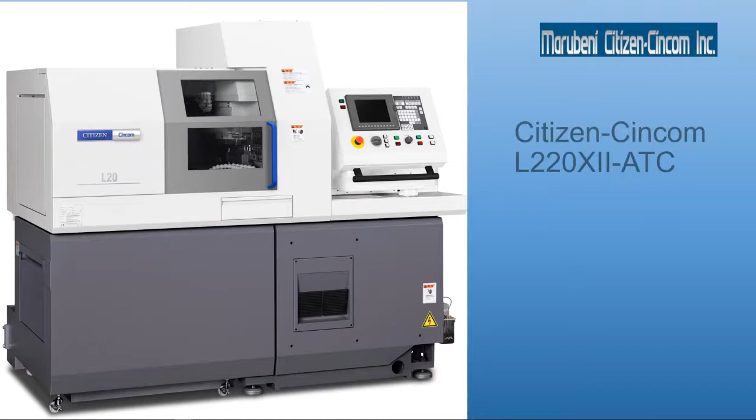We are here to talk about the Citizen L20 Type 12 ATC, as it's called, the automatic tool changer machine. This is the latest innovation in the L20 line of machinery from Citizen Machinery. We're going to do a little introduction today, let you know what it's all about. It does stand for automatic tool changer, something innovative that we put on this machine.

First of all, how did we develop this machine? I'm going to go back the Wayback Machine and give you a little bit of history about the L series and how we arrived at this point in time.

The L series machine, there's about a 30-year history of the Citizen-Cincom L series, and throughout that time has been a constant series of design improvements and innovations. We've not stopped making these improvements. The machine is actually one of the best-selling Swiss lathes in the world at this time.

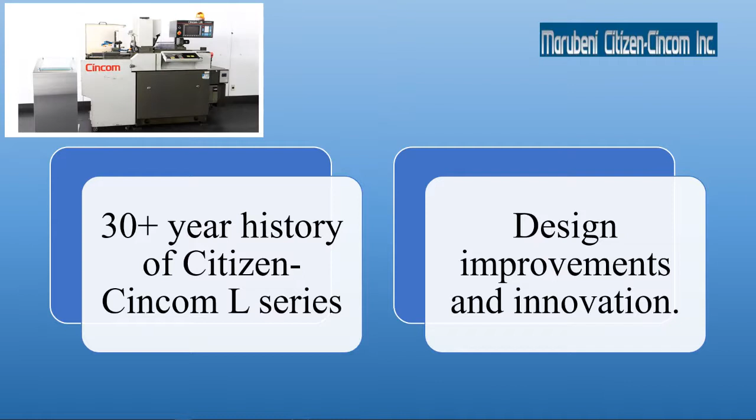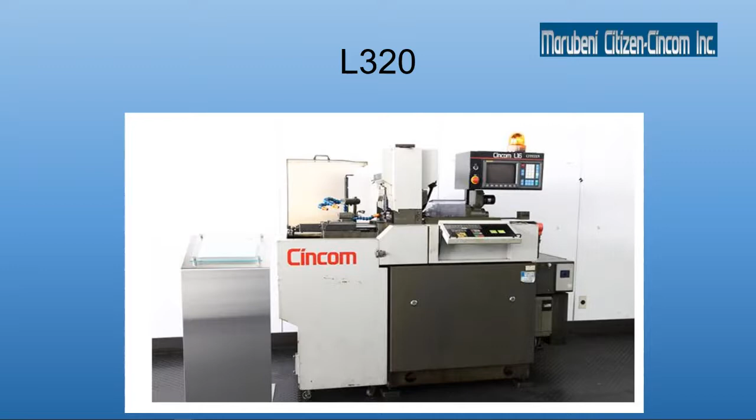The L320 was not the first L series, but certainly the beginning of the evolutionary process. Many of these outstanding models are still in service today. This says a lot about how well built these machines are. For some of us, this may have been the first Citizen-Cincom that we ever ran. I know it was mine. Very beloved machine in the industry.

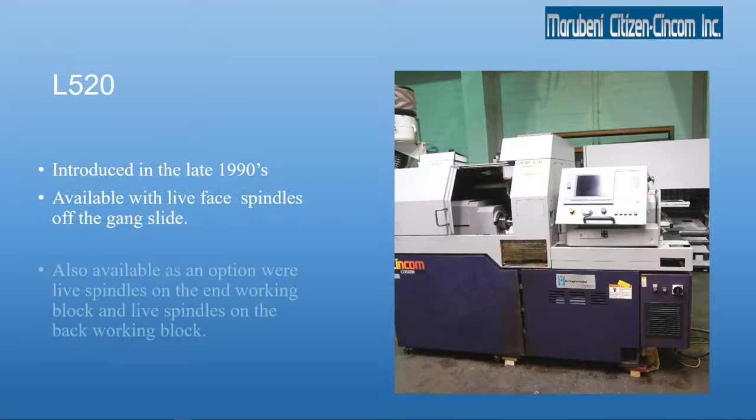The L520 was introduced in the 1990s and saw the introduction of live face working tools as an option on the gang. It was available on the gang slide, as well as on the back and end working spindles. Something new, very much a first innovation.

In 2004, we saw the L720 on the scene with more innovative features and options. Citizen always have a certain modular aspect of the machines, but the L720 was the first one marketed as a modular machine with several tooling options available.

Cincom Streamline Control made its debut on the L720. This is an innovative software machine construction that reduced non-productive cycle times by as much as 40%. Some customers even experienced gains of over 50% in productivity.

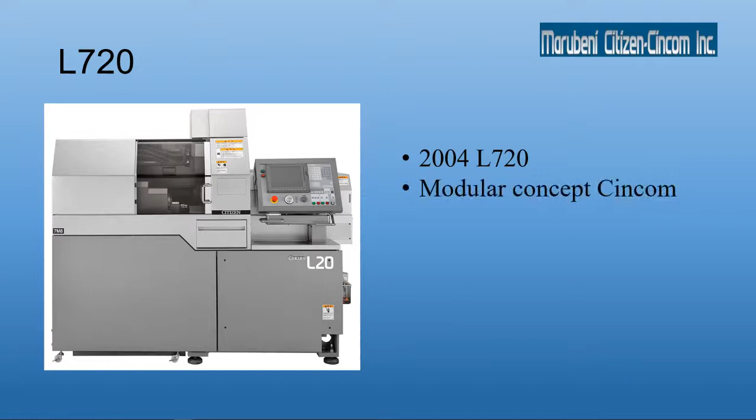It's a modular concept, streamline control. What does it mean by streamline control? Some of these innovations on the streamline control are things such as direct spindle indexing. No longer did you have to stop, orient your spindle, and then index to a certain point as you did in the past. Now it just went directly to whatever angle you programmed it to.

Some other features of the machine were the reduction in processing time, the macro processing and PLC ladder scan times were sped up considerably.

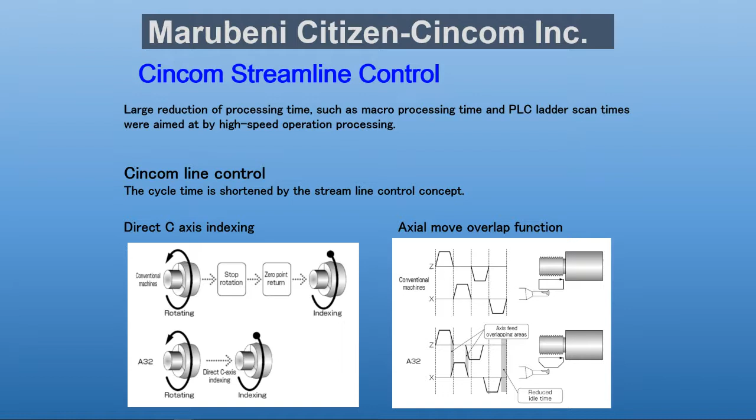Another thing was the tool overlap function. This allowed the tools, ID tools, to begin approaching the workpiece as the turning tool was retracting. No longer did you have to complete one operation before another can begin.

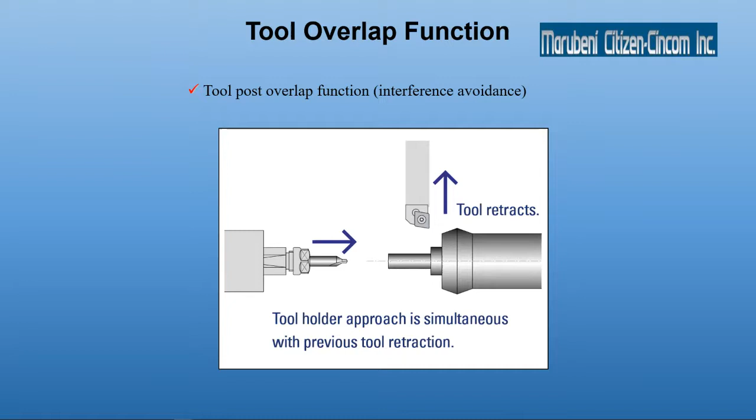Streamline control was really a game changer for a lot of customers. When they saw how much more productive the L720 was, they gained a significant amount of cycle time. My own experience is I had a customer who had an L720, found it very productive, but for reasons of finances, they could not afford a new one, so they went out and bought a used L520. Called me up about 3 months later, wanting to upgrade the L520 to the L720 control because they found out that the money they saved on the used machine, they were going to lose in the first year in terms of lost productivity. So this streamline control really added a lot to the game.

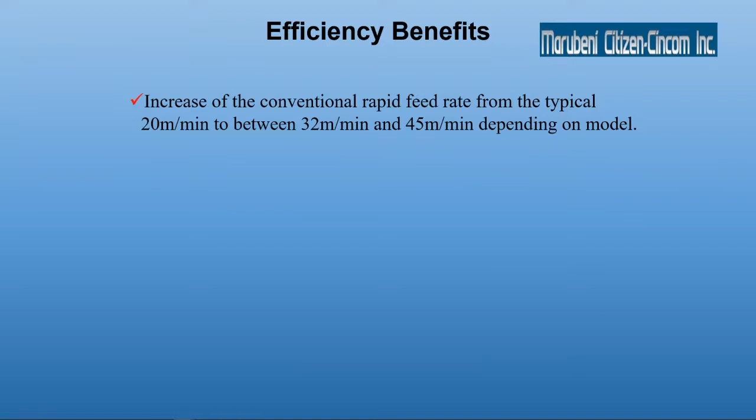Some of the benefits are they increased the rapid feed rate from 20 meters a minute to 32 and up to 45 meters, depending on the model. The acceleration/deceleration time was 1.6 times that of the conventional model. We had a shockless acceleration deceleration function to reduce vibration during sudden speed changes. So the faster acceleration deceleration became very usable because of this shockless function. So you could get there really quick.

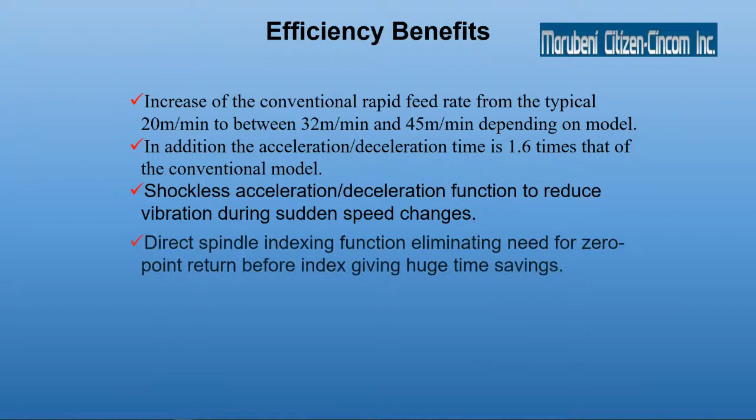Direct spindle indexing eliminated the need to zero-point return before indexing. The axis movement overlap, as I explained, during tool change.

Then along came the L20 Type 9 in 2010 with the additional tooling available off the gang slide.

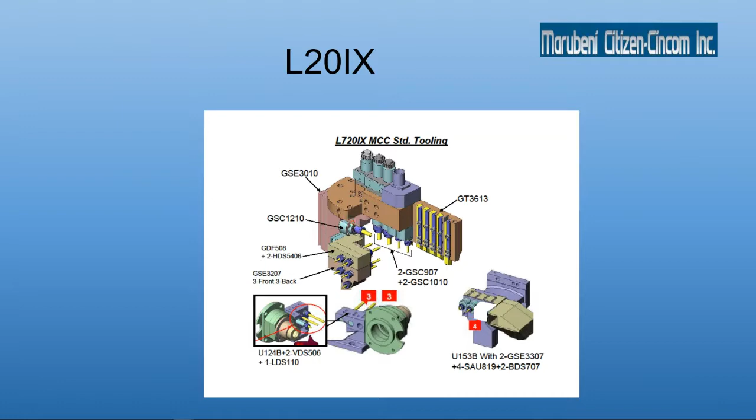I'll show you something here. Note this standard gang slide is standard with all L series models. You've got your turning tools, some cross-working tools. On the L20 Type 9, we had this additional tool block, which allowed for mounting in 3 positions, several different tool options. You could have a cross-working tool, end-working tools, live face tools front and back. In addition, we added a deep hole drilling function and a live tool block. So this was another step in the evolution of the machine, making it more functional and more versatile.

2011, we saw the L20E Type 10. This added a Y-axis to the opposite tool post, giving additional tooling capability on the front and back side. You can see here this is a modular area with 6 tools, 3 of them being driven. Back here you've got 8 tools with 4 of them being driven, plus the same tool layout you find with the L20 Type 9. So once again, we've increased the capability of the machine, still maintaining the basic L series platform.

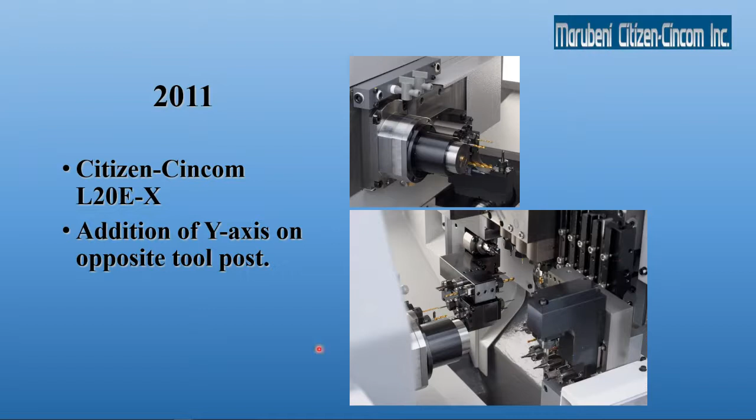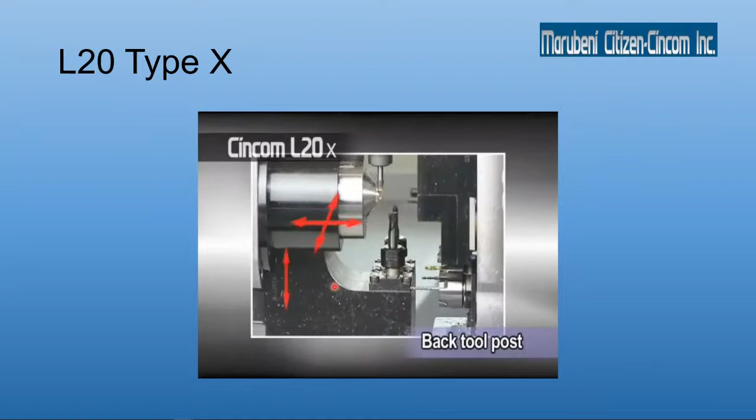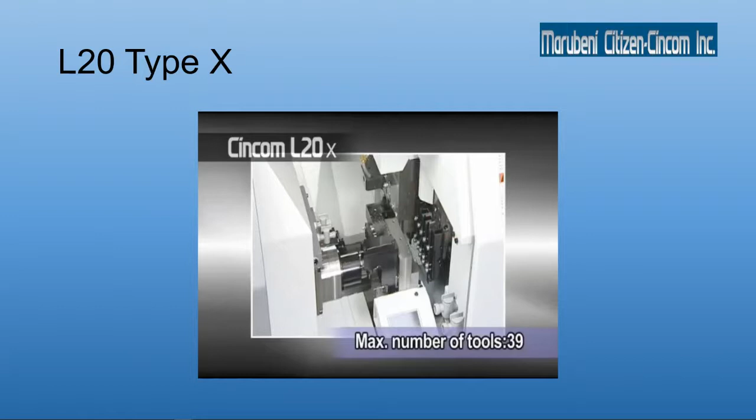Let's see a little bit how this will function. You see this, you've got your Y-axis in the front. This allowed actually for pinch milling as well. Now these features have been carried forward on all additional models subsequent to that.

2014 was a great year for MCC and Citizen. It was MCC's 30th anniversary, and to celebrate, 2 new innovations were introduced at IMTS. First off, the L20 Type 12 with a programmable B-axis and the gang slide was brought out. The Type 12 did not do away with the features on previous models; it only added to it, retaining the Y-axis and other modular functions.

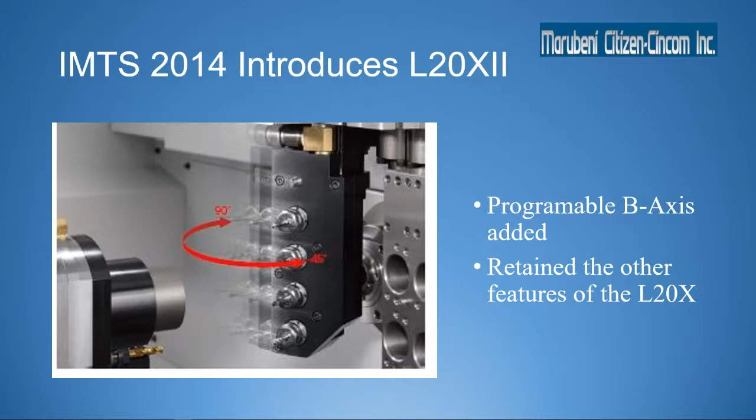Let's take a quick look here at the Type 12 in operation. Come on, Glen.

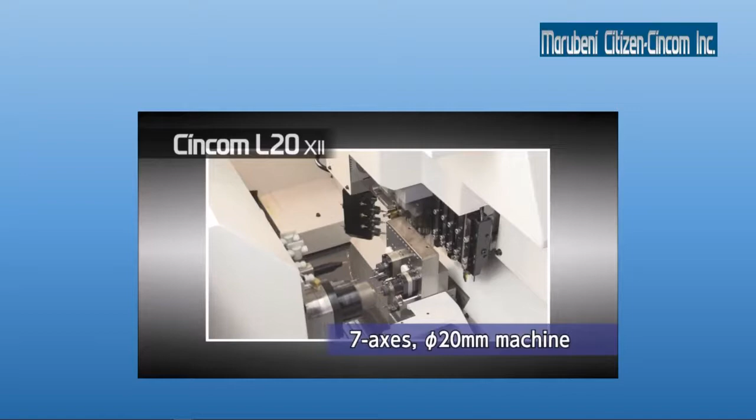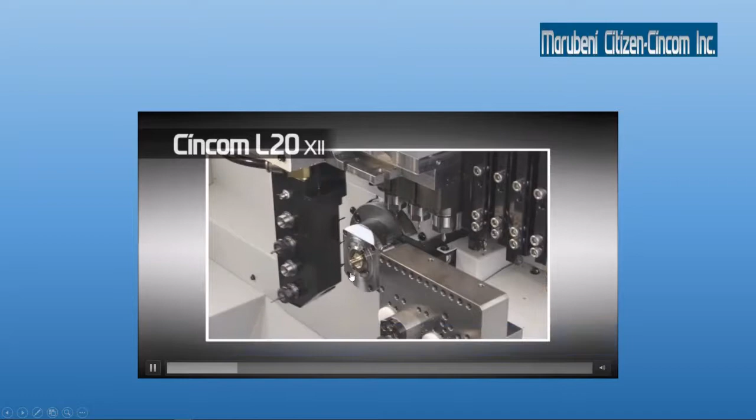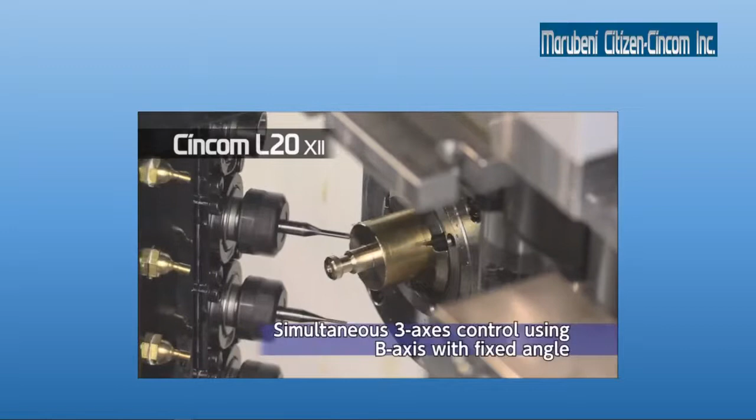So you see, we also got the standard functions of most L's. Of all the L's, we have the front drilling operations here. Looking very nice, very fast machine. Note the speed of the gang plate. Standard turning functions, as we see. Now you've got your B-axis programming in, doing some 3-axis contouring here.

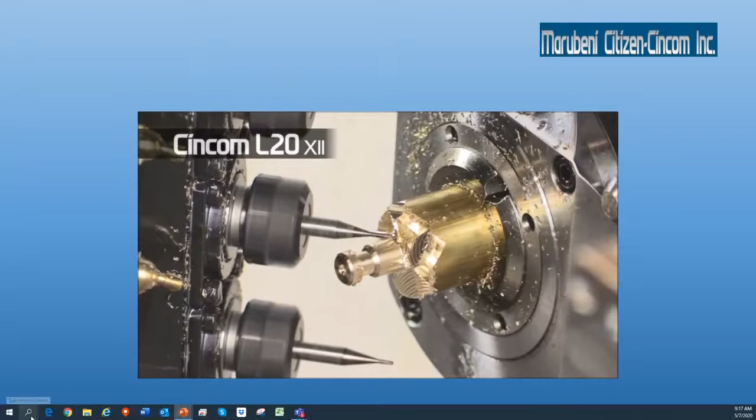For those of you who've never done this, one of the things Citizen also did is give some innovations to their software design to make the programming of angles relatively easy. You no longer have to make a lot of very complex calculations to get that angled hole or angled drilling. Citizen did things to make it very easy, and in future presentations we'll be talking about the B-axis and how to program that.

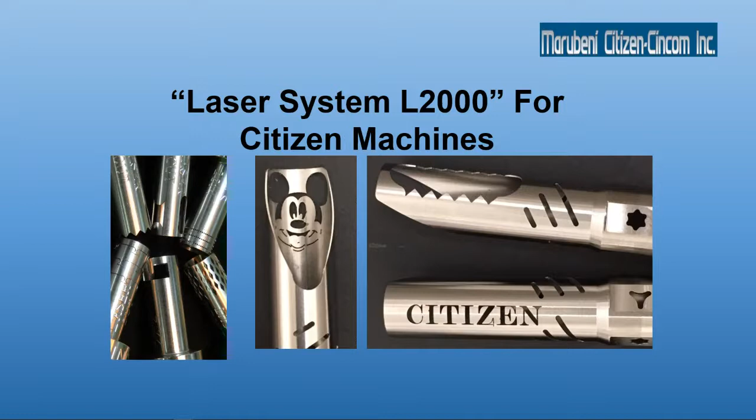The other thing we did that year was surprise everyone by unveiling the L20 with a laser cutting attachment. This was another game changer, allowing us to attach a laser cutting machine right to an L20 to make a lot of operations previously not possible. This mounted on any of the L20 models, greatly expanding the capability of the machines. This was developed as an add-on option that could be attached to not only new machines, but certain older generations.

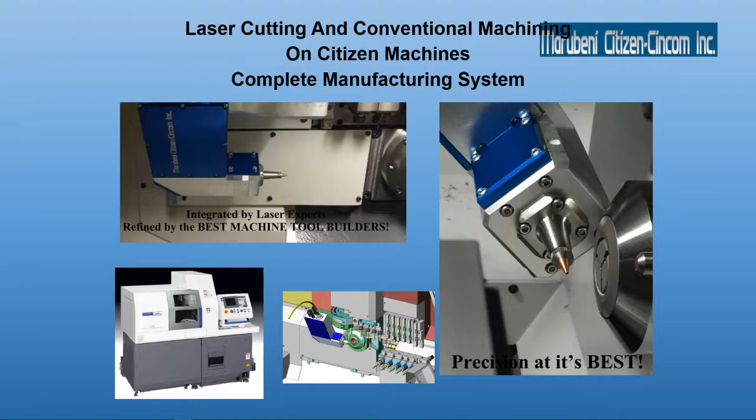Another interesting side note is the competition thought they'd beaten everyone with their laser at the show, until they saw that we had one as well, proving once again that we are the competition.

The next big game changer for the L20 and Citizen was the development and release of LFV Technology in 2018. That's low frequency vibratory cutting. As most of you know, this technology greatly improves productivity by minimizing, if not eliminating, chip wrap and buildup. Productivity levels skyrocket for users of this technology.

Let's take a look here real quick. This is just a demonstration of it. It's a very simple video to give you a show of what's involved in this and how it can save some time.

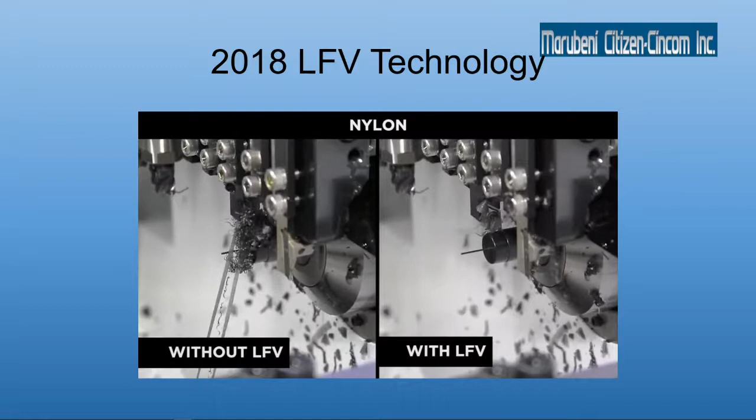Utilizing the LFV really cuts back, it minimizes, makes very small chips through the process. You can see on the left, standard cutting on a nylon part makes very long, stringy chips that can tend to wrap around the workpiece. On the right side with the LFV, the chips come off in very tiny flakes, no chip wrap, no wrapping around the part. No need to stop the machine to clear the chips as you would with other types of cutting operations without it.

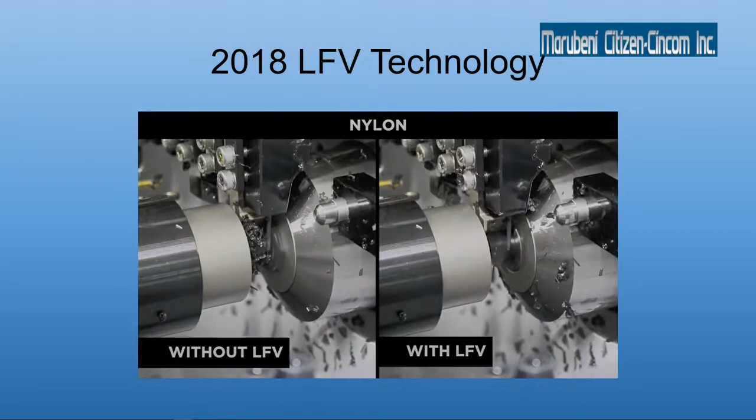We will cover this in greater depth in the future, but suffice to say that this was another major game changer for a lot of customers, drastically increasing their productivity as well.

That brings us to date: the L20 Type 12 with an automatic tool changer. At IMTS 2018, we unveiled the prototype of this machine, and now 1.5 years later, the L20 ATC is in production and released for sale. So what does it do? Let's take a quick look at how this tool changer operates.

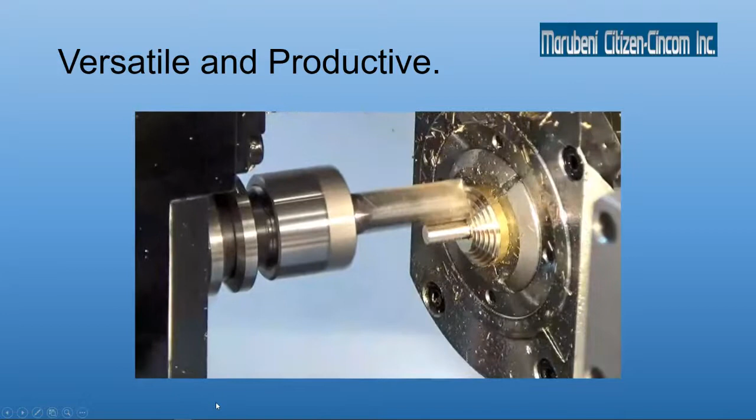It's mounted on a standard L20 Type 12, so you get your B-axis movements here, as you can see. Wait for it.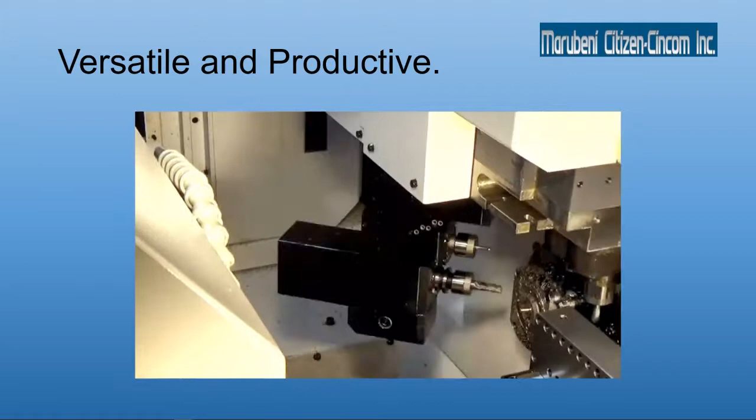I was amazed when I first saw this. When I first heard about the L20 Type 12, I thought that's kind of a dumb idea - who would want to put a big old tool changer on it - not knowing what it was about, until I saw this move and look at this. Very compact, very fast. I became an instant believer in this machine once I saw it.

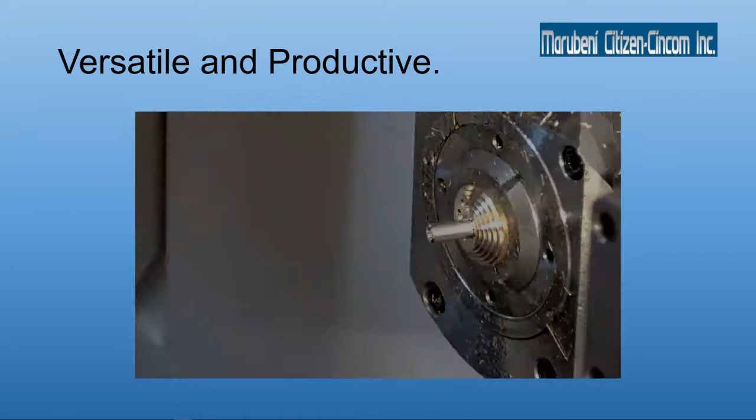Multiple tools mounted on this attachment. Standard Type 12 functions here. Compact, quick change, very fast.

Added to the ATC, the L20 still retains the basic layout of the machines. As you can see from the side-by-side comparison, the only major difference is the replacement of the B-axis spindle with the tool changer post. This is your standard L20 Type 12. We've replaced this tool post here, mounting this one here to give you your B-axis. All the back live tools, front live tools, and the Y-axis maintain the same.

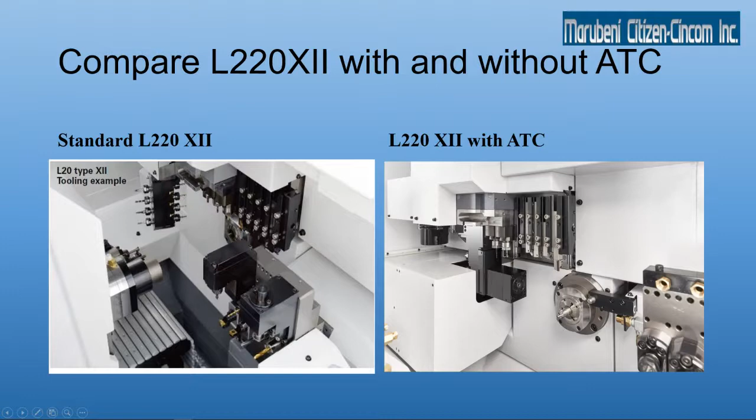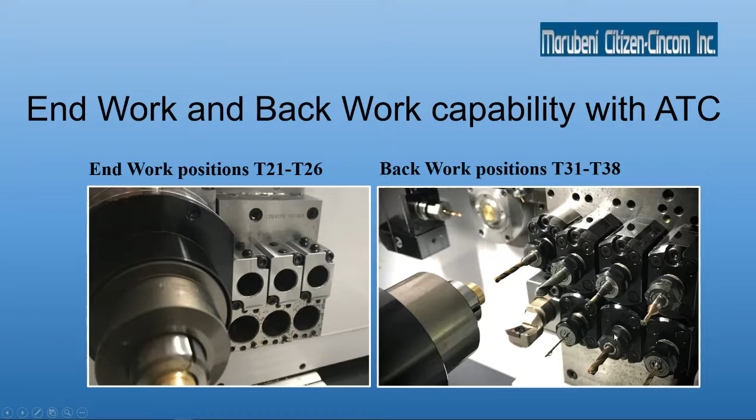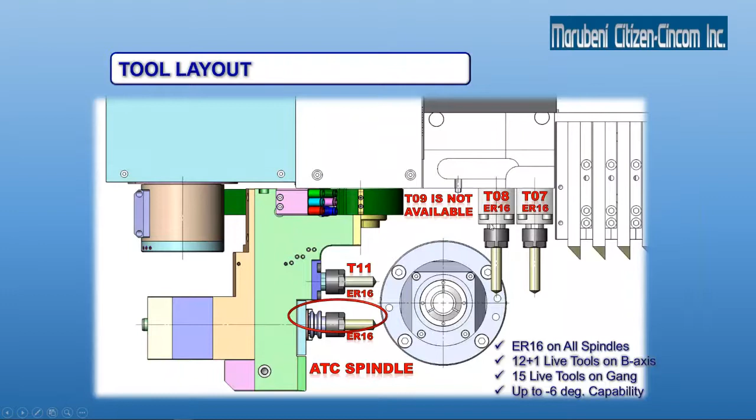You have your 5 turning tools, a couple of cross-working tools here. The back and end working capability with the ATC is the same as we have on the L20 Type 10 and 12, so we haven't lost anything - we've just gained a lot. The one thing we do lose in the tool layout is position T9, but with the addition of 13 live spindles, it's not much of a loss.

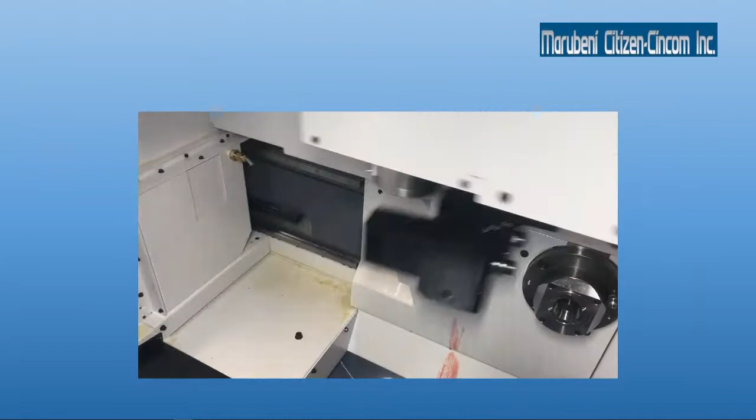Let's take a look at the changer in action here real quick. Basic back and forth, very simple.

Let's take a peek behind the scenes and see what's going on here with the tool changer. You can see the changer back here - it pulls out of the way so chips don't get inside during the cutting process. Tool changes, backs up, cover goes over it, protecting all the spindles here from any chips getting in there and damaging it.

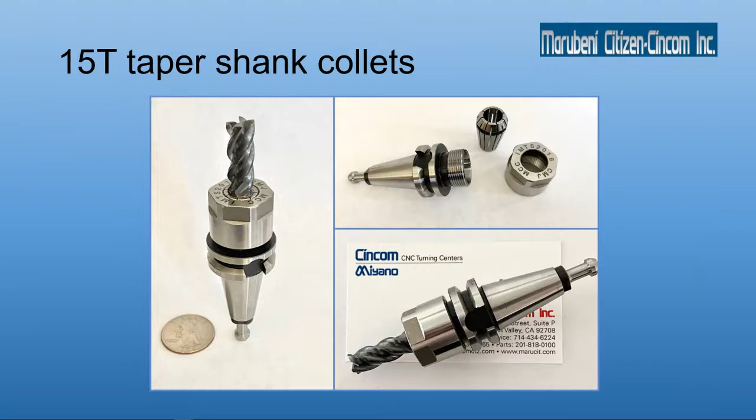Because of the size, we do have to use a little smaller than average tool holders. This is a 15T taper shank collet holder that we use on this tool changing machine. They are available right now. Currently we only have one source in the United States you need to be aware of: Yukiwa Seiko. This is the contact information for the company where you can buy them from, and we can get that to you later if you need it.

Some important specifications: the rotary tool spindle on the ATC has a 12,000 max RPM, very fast, with a 3 horsepower output. As I said, 15T taper holders. The tool changer is capable of mounting 12 tools, plus one permanently mounted on the spindle, so you've got 13 tools, bringing the total number of tools capable in this machine to 34. The tool change time, chip to chip, is 4 seconds - extremely fast. You can use a max 30 millimeter diameter, and the tool shank is 10 millimeters. It's an ER16 collet that goes in there, which is standard with our machines with the cross-working spindles.

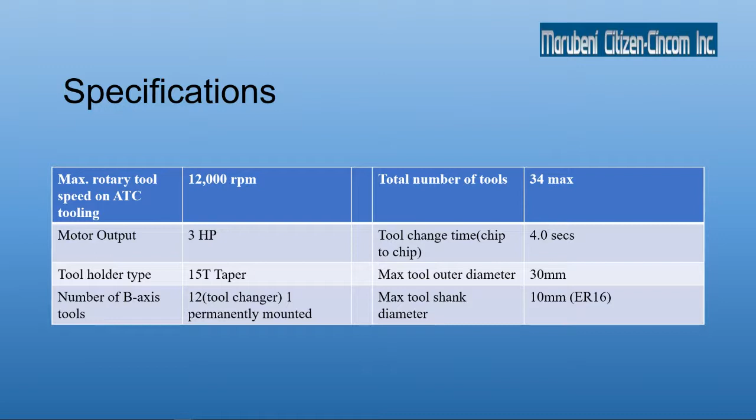As I said previously, the capabilities of the L20 have not changed. The B-axis is being fully utilized and enhanced by the automatic tool changer. Y-axis function remains the same. Tooling options at the end and back working are still available. The Cincom Streamline control is still used, and it continues to make use of the LFV function. The ATC is just one more added feature contributing to the versatility and productivity of this machine.

Let's take a look at this video and show you the complete manufacture of an entire part. This gives you an idea of not just the ATC, but also the capability of the machine and the speed that it functions.

Very nice machining of the angle of the stem, contouring around to give yourself a nice chamfer at the end of the part.

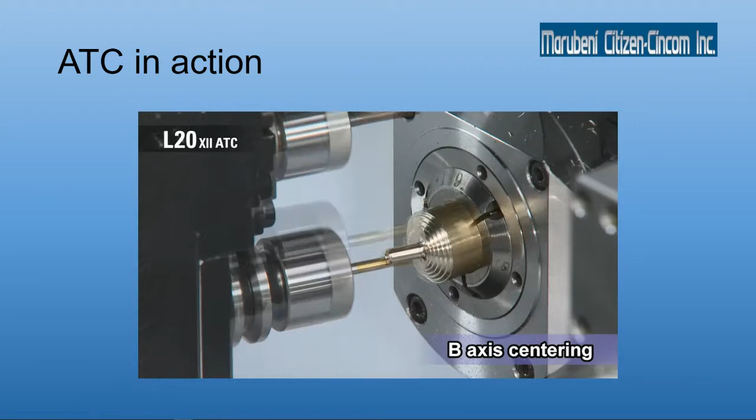See there, the tool handoff? Quick little helical milling.

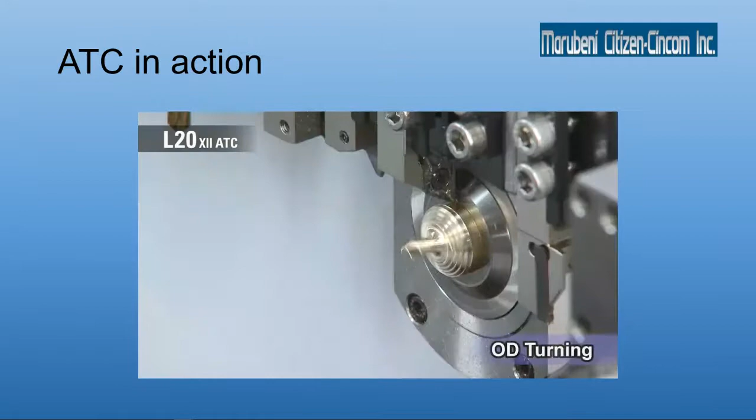One of the things most of you probably notice is that we're not doing standard turning and drilling, which most people associate with Swiss machining here. Most of these functions are done with end mills or rotating tools. Something to consider when looking at a Citizen Swiss machine: it doesn't necessarily have to be a standard turning or drilling operation. If the part can be made out of the 20 millimeter diameter or whatever the max capacity of the machine is, it can probably be made. So you see now we're milling the diameter with an end mill.

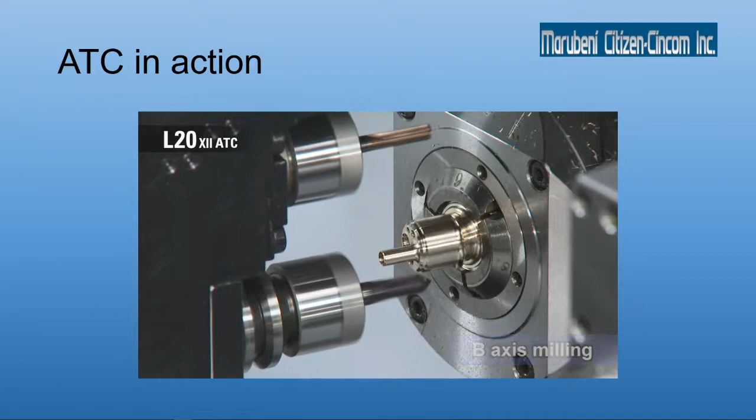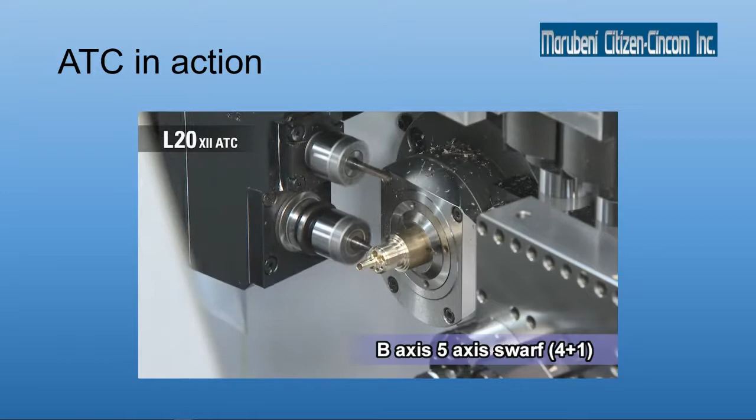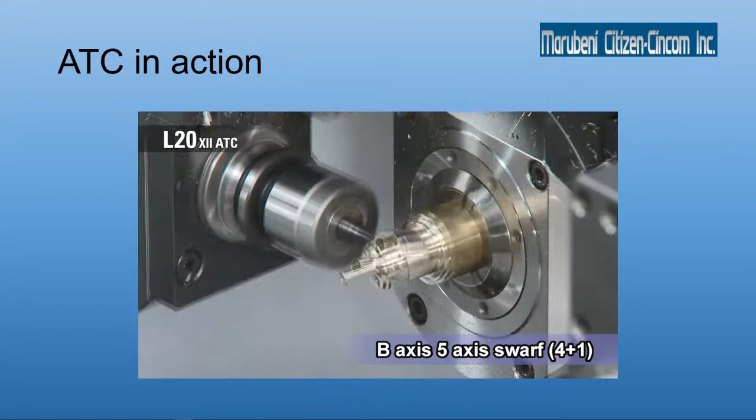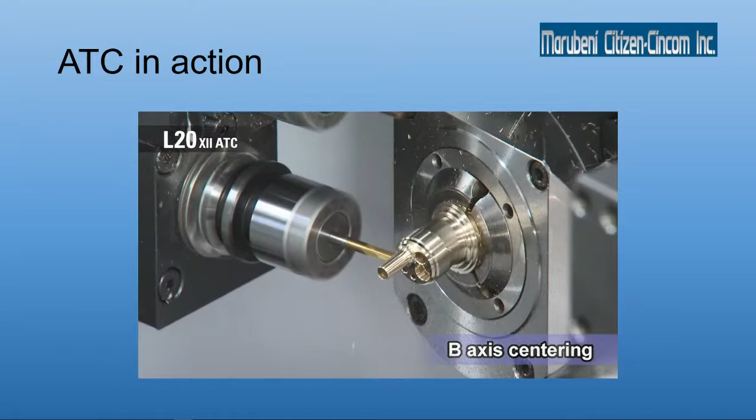Contouring here. I think you see that with all these tools, you can make an extremely complex part. The cost of the machine is relatively inexpensive as compared to a machine such as the M with the turret and gang slide with multiple tools.

Mill interpolation. As I said, Citizen's software has created features that make programming these angles and stuff a lot simpler than they used to be. We will be covering the programming of this machine in a later presentation.

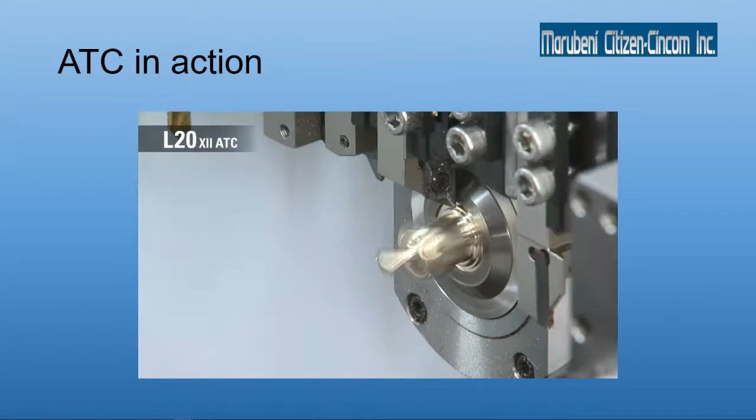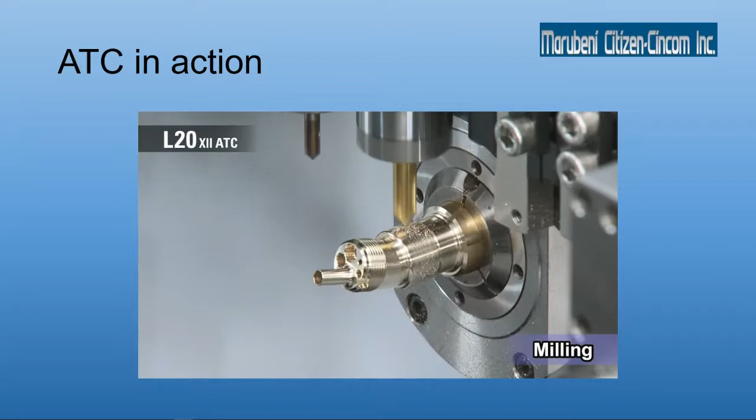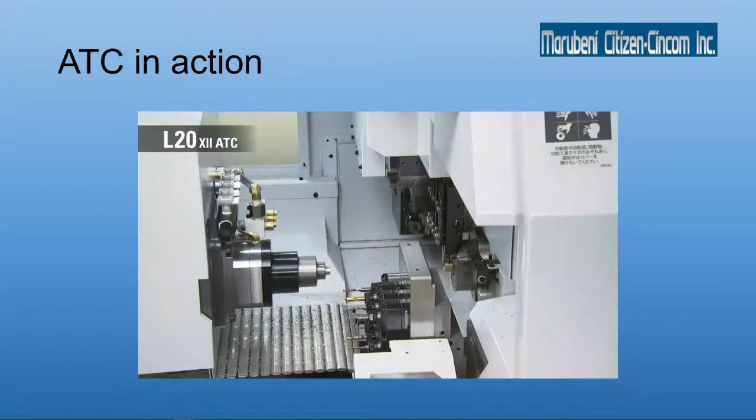Okay, and we're going to bring it on home now with a cutoff move. I'm going to show you here that even though we've added this ATC, we still have the functionality of an L20 Type 12 with the back block and the live tools.

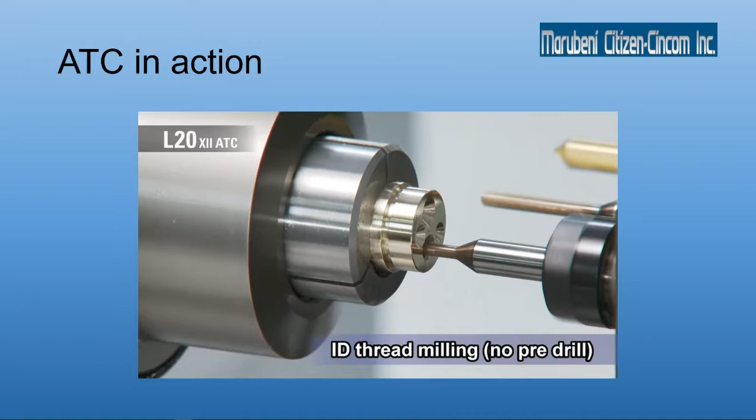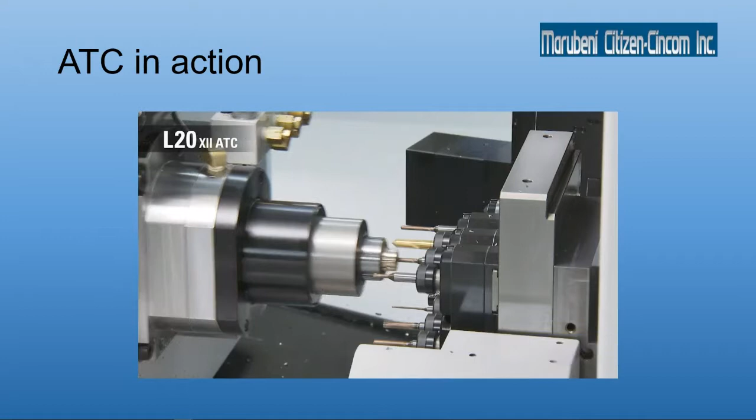Again, we've just enhanced the machine by adding the ATC, making it much more productive than it was otherwise. So if you need the versatility of having a lot of tools mounted, or you want multiple setups on multiple parts set up at one time, this machine gives you that capability.

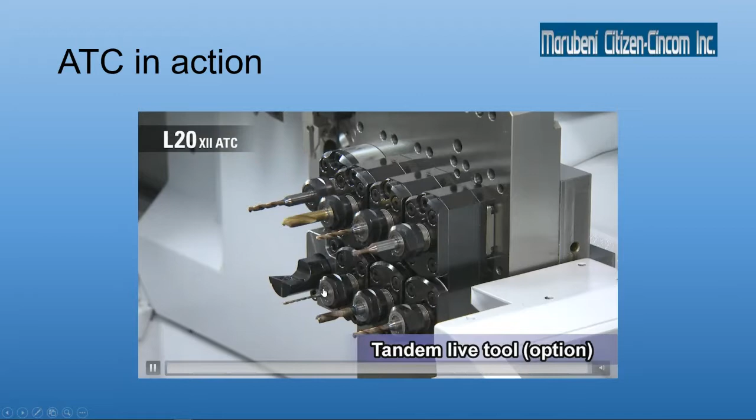There's a little bonus here I've thrown in. We've actually added tandem tools on the L20, something you can talk to your sales about.

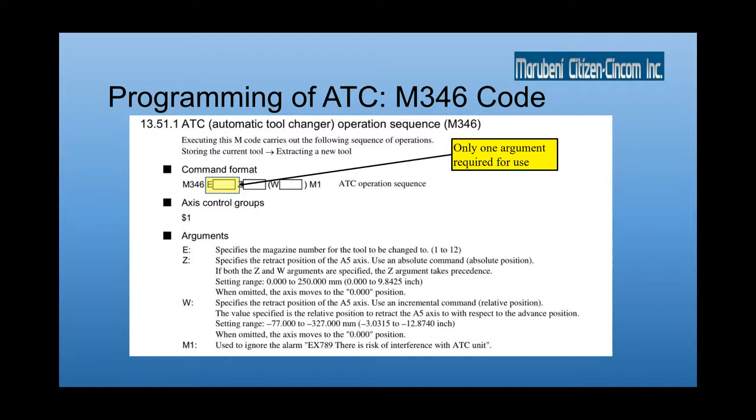Everything starts with the M346 code, of which only one argument is required. That would be the E argument, which specifies the magazine number for the tool to be changed to. Optionally, to save cycle time, you can give it a Z argument, which will leave the magazine out for consecutive B-axis operations.

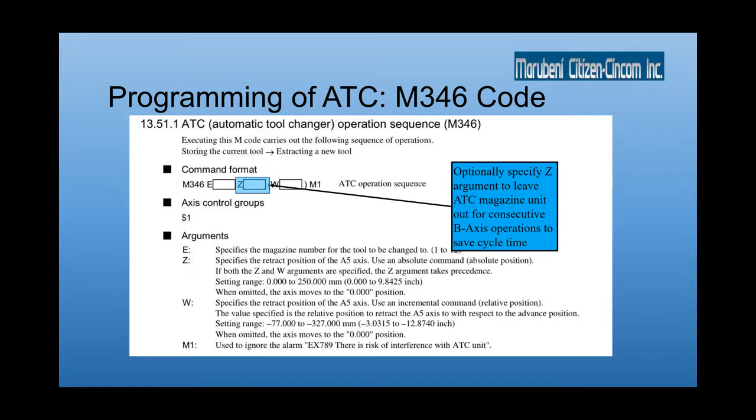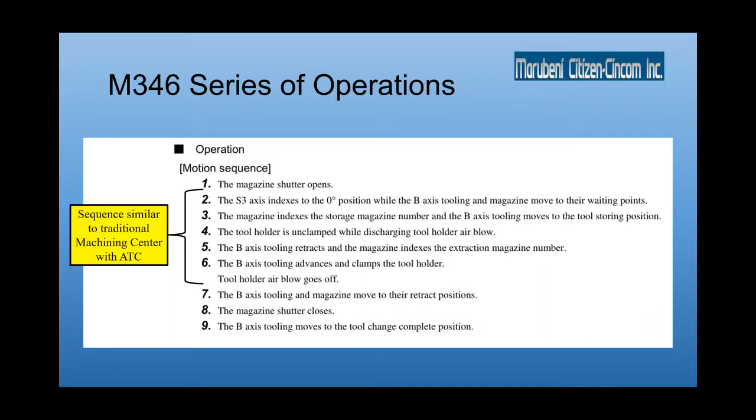I want to touch on the series of operations. It's very similar to a traditional machining center. There's an air blast that turns on to keep the tool holders clear of chips.

As far as programming, it's about 4 basic steps before you can begin cutting, so it's pretty simple. The first code would be your M346, and this is going to store the current tool and retrieve the tool from ATC magazine number 2.

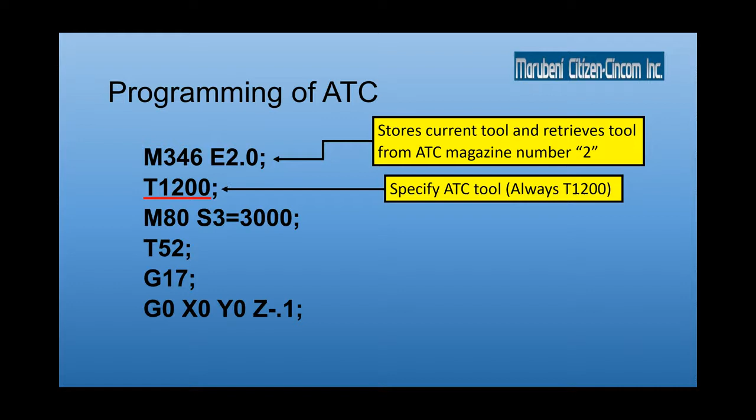You're going to call up ATC tool number 12 - it's always tool 12. Then you're going to turn on the spindle, 12,000 max RPM, and then any available offset. I prefer to use T51s through T62. And then basically at this point, you can begin machining.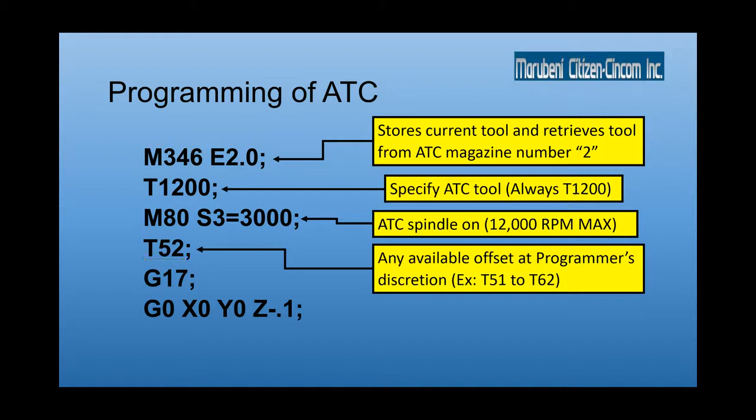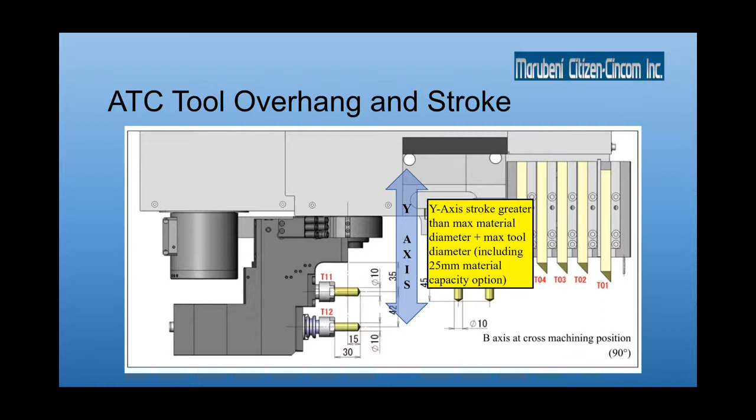You've got plenty of room basically to cover max material diameter, max tool diameter, plus if you have the 25 millimeter capacity option. One thing to note, there is no B-axis for the subspindle.

Manual operation of the ATC. There's a dedicated page of the preparation screen where most of your operations can be performed as far as the magazine case. There is one physical button outside the machine, which is what you use to tool clamp and unclamp.

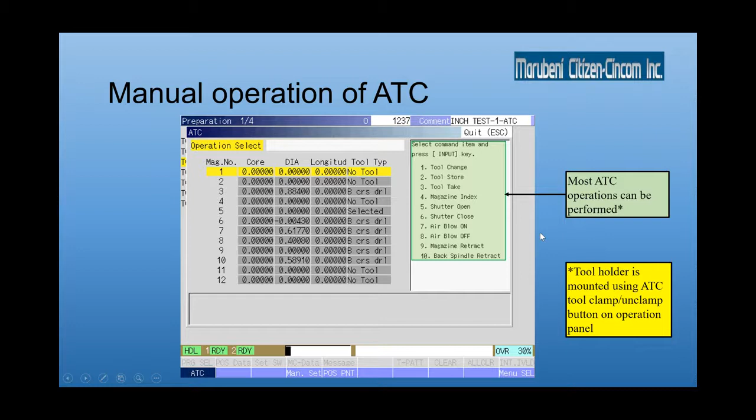As far as tool setting, it's pretty basic. I generally will set the tools in the holder outside the machine to 30 millimeter max. In manual mode, mount the tool holder on the ATC spindle using the tool clamp/unclamp button. Just like the B-axis on the older L20 Type 12, it's set as a cross tool, and then you can just set the tool using diameter.

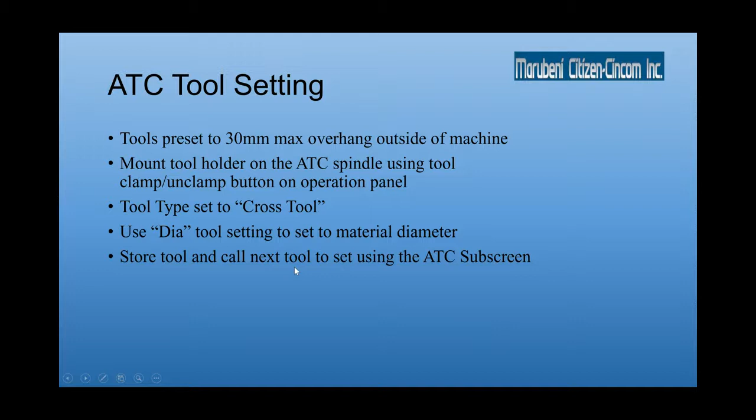Then you can go to the ATC subscreen and select magazine number and tool change, and that's basically pretty straightforward as far as calling the next tool to set, and you just repeat the process.

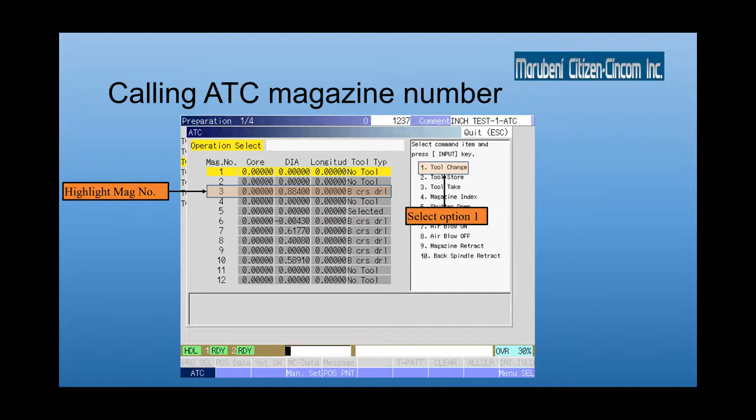So I might have moved a little bit quick there, but just wanted to run it through basics. So just one M-code, only 4 steps to begin cutting, and tool setting is very similar to B-axis setting on an earlier Type 12 machine. And that pretty much wraps it up.

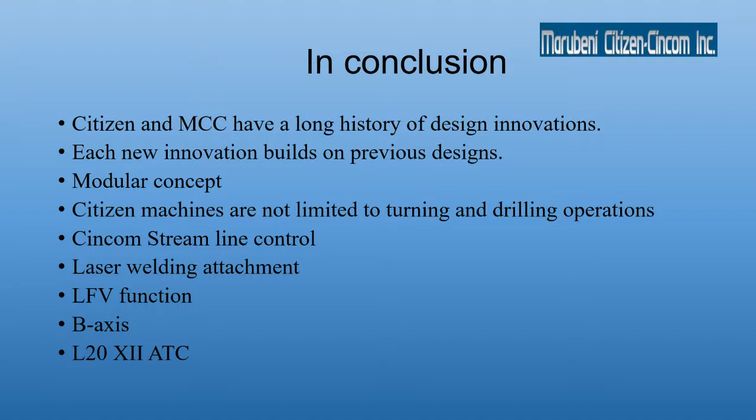That brings us to the L20XII, the automatic tool changer. It is available for sale right now. It was just recently introduced, and that's what we're talking about today. So you may ask yourself, how can I buy one of these? Well, there are two ways you can go about it.

The machine can be purchased from the factory with the ATC already installed. Keep in mind this will be a special order, because what we've decided at MCC is to sell the automatic tool changer as a retrofit kit. So we've started bringing machines in what they call ATC ready, meaning the machine can have this added on in the field or at one of our offices for delivery to you.

Currently, we are stocking machines that are not only LFV ready, but ATC ready as well. Contact your local dealer and they can give you the pricing on this and get you going on it.

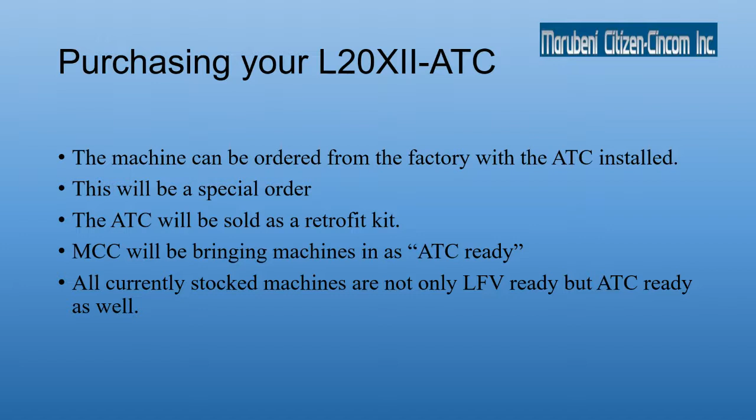So with that, I hope you guys learned a little bit. We're excited about this machine. We think it'll give you a lot of capability. It's got a real place in the future of MCC and Citizen-Cincom.